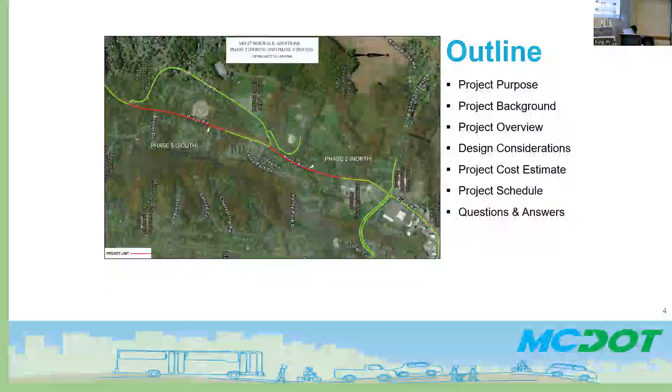As you can see on this slide, there is phase three and phase two. It's a continuation of phase one that's done, on Oak Drive. Phase two starts at the end of this intersection and continues to the Damascus High School. And phase three starts from the Oak northern intersection up to Landing Place. As we go through the presentation, you will see the rest, jumping back and forth.

Here's the purpose of the project. As I said, extending from the northern intersection of Oak Drive to the existing sidewalk at Damascus High School. And phase three extends from the southern intersection at Oak to the existing sidewalk. We need to provide a continuous safe pedestrian path, because right now it's not continuous. Certain segments of the street don't have sidewalk. So the purpose is a continuous sidewalk safe for all pedestrians and all bikers.

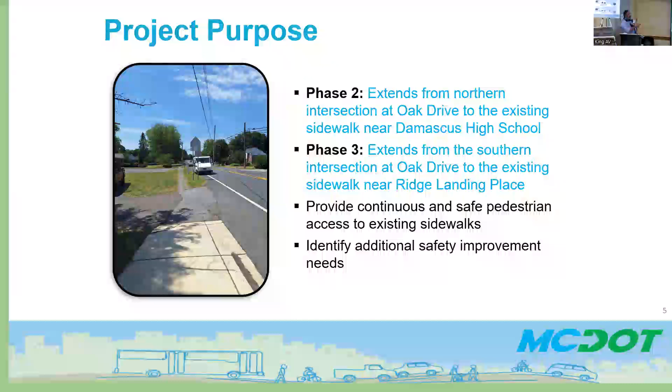The project overview: this project is a part of the master plan for Damascus for 2006 and Montgomery County for 2018. This has been studied before, and as of the master plan, now it's time for us to do the design and implementation. Phase one, which is Oak Drive, as some of the gentlemen were asking earlier, was designed in 2020 and constructed in 2022. That's the segment with Oak Drive right here.

Now we're doing phase two and three combined, which we call north and south, just for the north and south section. At this moment, we finished the 35% design. Our company did the 35% design back in fall 2024, and we'll explain in detail when we get to the schedule later on. You can see where we're at this point.

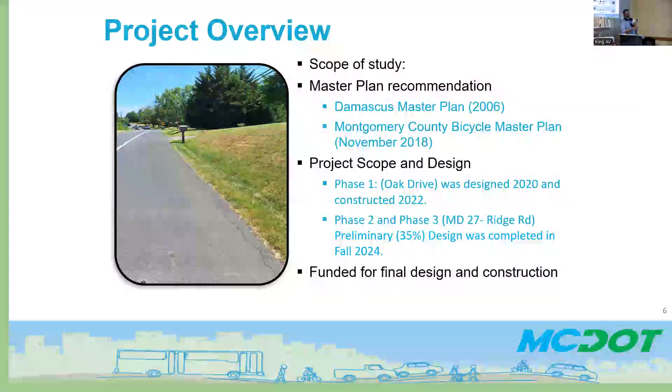The project is funded completely. Montgomery County funded the project for design and construction. For the project overview, as I said, we are at the preliminary stage, so the preliminary engineering design for phase 2 and 3 has been done. That means earthwork, like geotechnical reports and soil borings. If you live in the area, you may have seen some augers come out and do some boring. We've done some survey.

That's our team. These are important for us to have a thorough and complete understanding of the soil condition from a design standpoint. After this 35%, as you see, we are here in the public meeting. We're going to continue with the final design and construction, but there are some steps I'm going to explain in detail when we get there.

The existing condition right now, if you go outside, the road is two lanes with shoulders. The speed limit is 40 miles per hour, and the right of way varies from 40 feet to 140 feet. Along the segment, right now there's discontinuous sidewalk, a lack of crosswalks or striping, and unsafe pedestrian paths. So for us and the county, we need to make a product that's safe for everyone. The zoning is mixed use, so in this area there are different types of zoning.

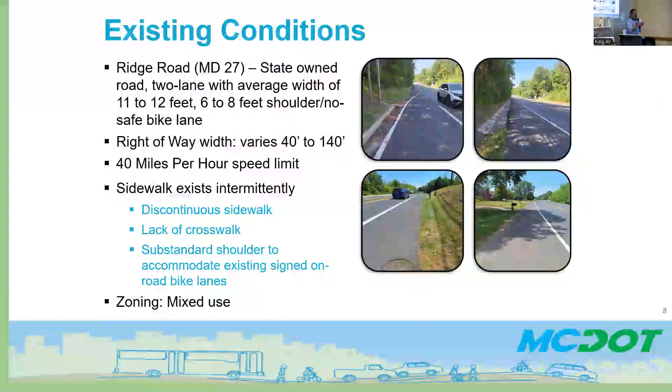For design considerations, we follow the Montgomery County Complete Streets Guidelines, and according to them, this road is called a Country Connector. If you look up the Montgomery County design guideline, it has a specific design width, and we'll get into that in the next slide. The target speed is 40 miles per hour; we're not changing the speed limit. The travel lane will be minimum 11 feet, and we don't intend to change the travel lanes at all. The sidewalk will vary between 5 to 6 feet wide.

We have to do a lot of stormwater management work because we're creating new impervious area, so we're going to put in new inlets. We'll also have to do some utility work on manholes and outfalls. We'll do some landscaping work because there are many trees we need to cut and replace with new trees per Park and Planning and county requirements, plus some drainage work. But for the work, we're not closing the road or the travel lanes.

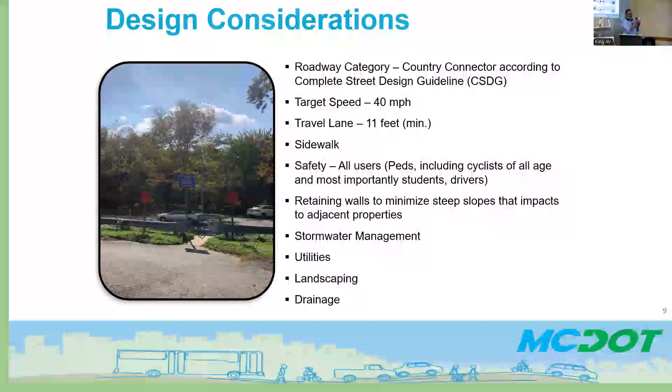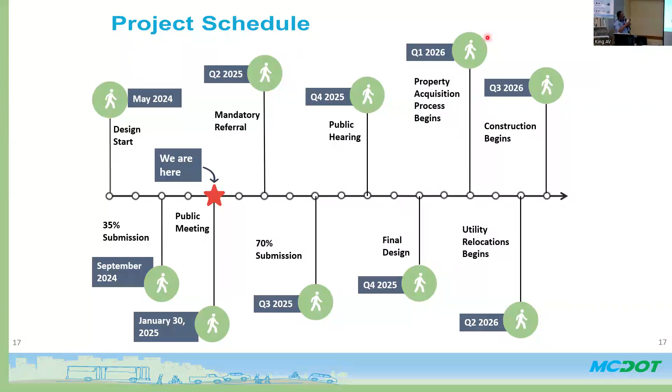The project schedule, as you can see, that's the timeline. The project started design in May 2024, last year. After that, we did the 35% design in September 2024. And right now we're at the first public meeting, which is today, January 30th, 2025. After this, we're going to mandatory referral for the county board and advisory committee in quarter 2, 2025. And after that, we go into quarter 3. That will be the end of 2025. In 2026, property acquisition should begin in the first quarter, and hopefully construction will start by quarter 3, 2026. And with that, I'll give it back to Kevin.

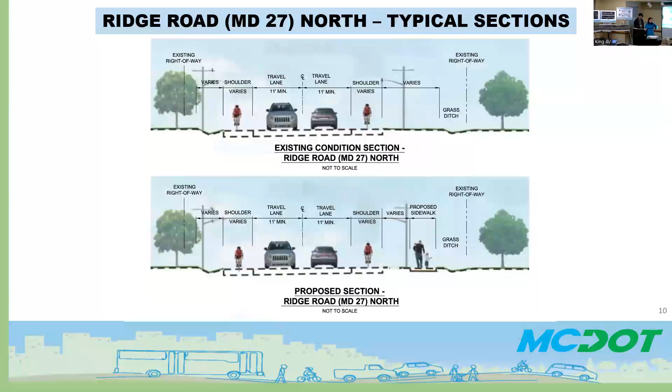But in north, the good thing, the conditions work for us. We don't have up and down. It's level. That segment, which is phase 2. Yeah, north. All that stretch is kind of level. Relatively, yeah, not drastic. There's some retaining wall, you're right. So here at the beginning, I need to build 2 retaining walls, those 2 houses. But the rest of it, no retaining wall needed. Versus that one, you have a lot of retaining walls to be built.

Right. So in our lawn, there's probably a 6-inch delta between the roadway and our lawn. And we have an old and decrepit sidewalk currently there. So the question would be, are you going to regrade down to have the sidewalk or bring it up? Well, I may not have a good answer now, because when I'm designing this, I have to go the whole stretch of the road. Let's say 500 feet or 800 feet. I need to make sure from the beginning to the end, I'm not exceeding the slope.

Which is, like Rebecca explained, the ADA, so 2% cross slope and 5%. We need to make sure we are within that. So it depends. You may end up with minor cut or maybe fill, but we never want to have up and down. That's not something we need to do.

And is there a means to prevent vehicles from mounting the sidewalk? There's curb and gutter, so they should not. Okay, so there is curb. Yeah, that was kind of the question. There's the red. That's the curb and gutter. So we need to put a curb and gutter, for sure. And then the last question is related to the acquisition costs. Can you explain what's included in that?

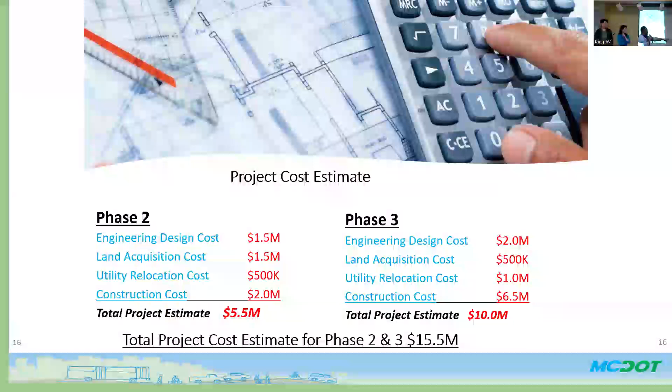So I will talk and Rebecca will talk more. Here, maybe this is a good explanation. See this line, the white one? That's the property line. Here, we don't have a problem with the property line, not much acquisition happening here. However, that segment from the beginning, we have a right-of-way issue because all this sidewalk segment will be built within the right-of-way.

So we need to acquire, the county, and we will have to acquire lands from the property owner up to that house. So for example, that's a house in Wilson. From here, it sets back. That's the right of way. So the right of way varies, and the acquisition will happen for the homes that we have the sidewalk in their property. Sure. And that's why the county thought of this, and they have more money. If you notice, there's more money, 1.5 million, here because of that. Correct. Here, not much. So hopefully Rebecca can.

First of all, I would just like to say, this estimate is only preliminary. The numbers will change as the design progresses. For phase 3, right now, we only anticipate what we call a temporary construction easement that allows us to do grading just for the construction. It doesn't change the ownership of the land. It just allows the construction crew to get into the property, construct it and get out.

Whereas phase 2, we might need what's called a perpetual easement in addition to the temporary construction easement. A perpetual easement also doesn't change the ownership of the land, but it allows us to get into the property for any future maintenance work that's needed on the sidewalk or stormwater management facilities that might be located in the property.

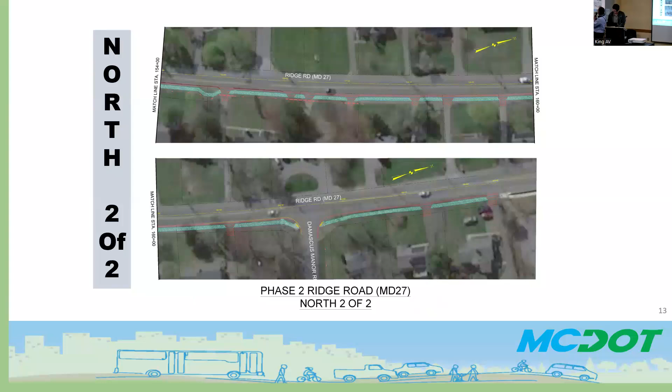So this retaining wall, for example, where it's like 10 feet, is kind of facing the people living here. If someone is living in that area, definitely the aesthetics are important. That really represents one image and doesn't represent my yard or a lot of the trees along the way. I appreciate you answering. I really don't believe you could answer the question at this time, but you can go ahead. I can tell you what I'm thinking, because I'm working on this project.

So yes, we're thinking about the aesthetics. If it's facing a home right here, definitely we need to make sure it fits. But if it's facing a forest, we don't need it to be aesthetic, it's a forest. But if it's facing your house, for sure. And if it's facing the people walking on the sidewalk, definitely. There's a lot of precast concrete that can have a nice, aesthetically pleasing structure. That's something we can take.

The second question, about the landscape or the root zone. We have a landscape company working with us, Floura Teeter, and they thought of this. For the trees, I am aware of what you said. There's something called the structural root zone and the critical root zone. The structural root zone is the one near the tree; if you touch it, the tree will fall. The critical root zone is wider. If you cut it, the tree will not fall, but it could affect how it takes in water or lives. We have this, and that's the drawing behind you.

If you want to go, feel free. Landscape drawing right here. I think I can show you landscape 66. So the trees, that's what you're concerned about, and these circles represent the major or minor trees. We have all that accounted for, and some of the trees have to be removed, unfortunately, but some have to stay.

Yeah, the purpose of this is improving the connectivity of ped and bike facilities, ped facilities here in this case. So there will be crosswalks. Even if you don't see it in the 35% design, that will be developed beyond the 35% design; you're probably going to see it in the 70% design. Yeah, it would make sense to connect the phases together.

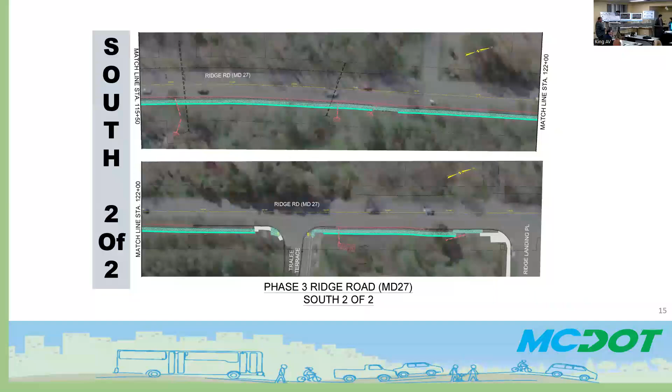Absolutely. And then my other question is the existing crosswalk, which is at the north end of Oak, has proven to be somewhat substandard. There was a child run over last year and seriously injured. Maybe a consideration to beef that up, since it's a major crosswalk for school children. Okay, thank you for sharing that. We'll definitely address that.

Hi, my name is Pam Armstrong. I've been a resident of Damascus for 36 years, living on this very busy road of Route 27, and watched the traffic and speed get worse and worse. I run a business on Route 27. I have 2 driveways. I will probably have the highest retaining wall. So I have some concerns about the retaining wall and the existing trees lined up along my property, and how much of that will be taken down.

And when I spoke to you on the phone, you said the sidewalk will be 5 feet wide, right? 5 feet wide. And you said the existing culvert will not be replaced. I said we put it under drain, under pipe, 15-inch HDPE pipe. But that'll be under the driveway? Under the driveway, yeah. But the concrete culvert that's there existing will not be replaced? Yes, if it's within the site.

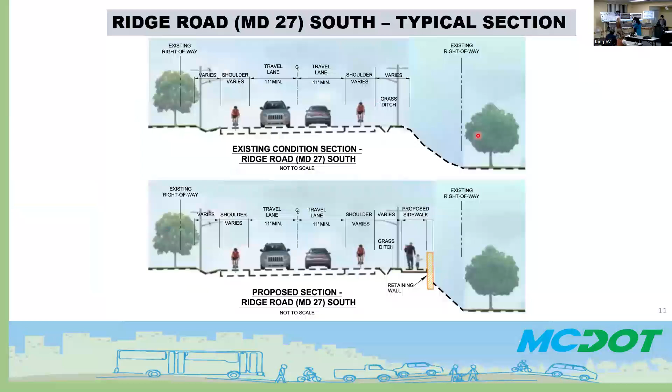So that's your property, right here. And that's your first and second driveway. So the mailbox is right here. Okay. Have a drainage pipe down this. Water comes here. And so the flow, you see the arrow, it's flowing this way. So if the water comes this way, it's still gonna go. But you're saying your mailbox is, not flooded, but just hard to... Nothing, the water doesn't come on this side.

Okay, so Norman will take note of that and that house. So we'll look at it. Sure. Thank you. Yeah, we'll adjust that with the grading. A few more questions. Yeah, sure.

Also, when I spoke to you, you said the retaining wall will have a ditch on the other side? So yes, for some retaining walls, as you see, we have the pipe, there's the ditch behind the wall to collect the water coming, because your house is the highest. Water will come here. So we don't want water going under the wall or causing structural issues. So the water has to be collected and driven to the final inlet condition. So the water should not be ponding behind the wall.

Okay. So will that be like a dip? We're still thinking about it. We may put a pipe to collect behind the wall, or a grass-lined ditch, most likely. Grass, so it'll be a divot. We're just anticipating a grass-lined ditch for the time being for 35%.

Okay. And so the other question, if that's grass, who maintains that grass? Is that my responsibility as a homeowner, or will the county come and cut that? If the grass ditch is within the county right of way, then we, the county, maintain it. But if it's not, then that will be the homeowner's responsibility. Right, because I have a fence along the top of my property. The county will maintain it because there's a wider right of way here. So your line is right here. So that should be answered.

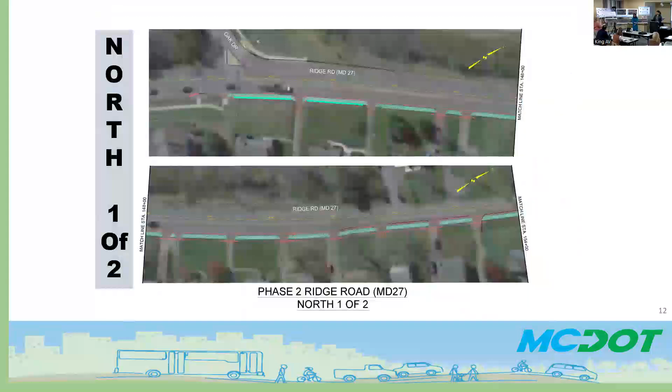even if it's a crosswalk in the pavement, not ideal, but it makes drivers aware. But the seniors are crossing every morning. Yeah, absolutely. And you're the second person here tonight to bring up that new senior apartment. So that's something we'll look into as well. Oh, two separate senior. Okay.

Could you? Yeah. Yeah. Yep. So I have no. On 27. Yeah. I can visualize it, but do you know what the closest road is to it?

Is that there? Yeah, so there's two new ones here in Damascus. So there's the one on 27 that she's referencing, and then there's the one just across the street from this building, literally, I gotta think about what way we're facing, right there. Yeah. The St. Anne's one is associated where there's a church property there. Yep.

I mean, that just solidifies another reason why that sidewalk needs to be on the other side, because those senior citizens have no way of walking. If they want to walk to the rec center, or if they want to walk into town and go to Weis, they have no way of getting there. They have to cross Route 27. And that is dangerous. Yeah. Take note of that, yeah.